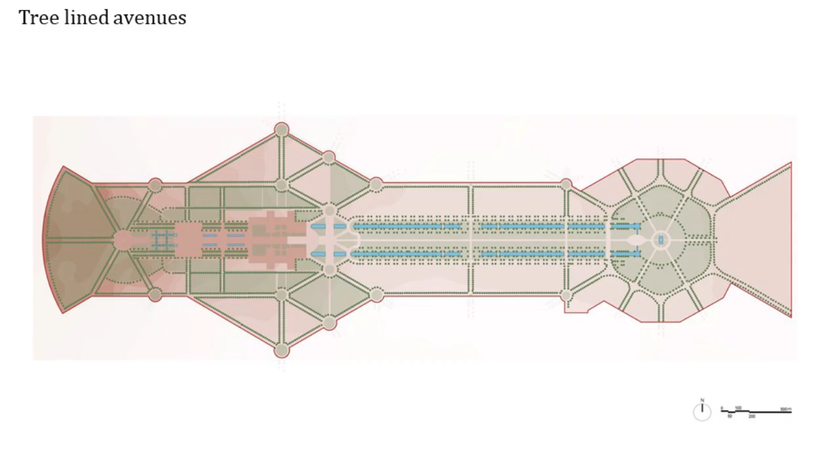So what was the design of the Central Vista about? You had this gently sloping terrain on which a terrace was formed, and a grid of orthogonal radial streets was created. There were formal gardens, a processional route was created, tree-lined avenues were put in - I'm just rushing through what was a very complex process.

Buildings that were imagined - this is from a sketch that Lutyens put together, and this is what actually got built. So here you have a grand boulevard running right through the middle. You have what was Government House, North Block, South Block. You have nodes in between, a gateway here, and this is the focal point - gateway and nodes. That's the essential design of the place.

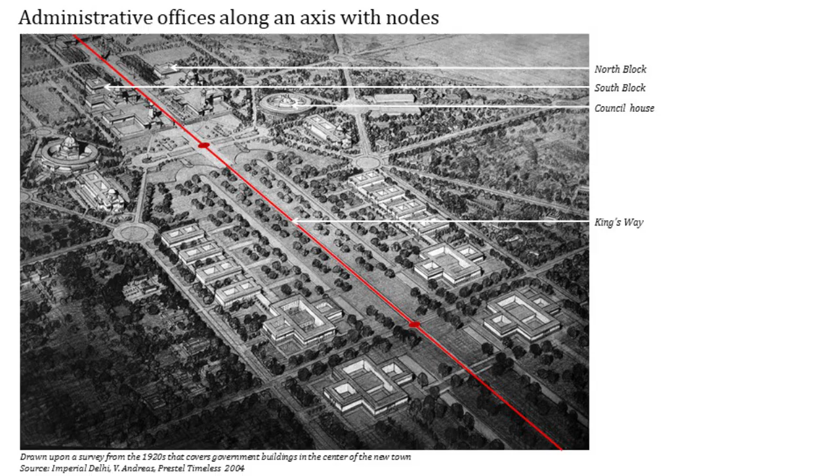So here you have the gateway at one end, India Gate, and this is the sketch that Lutyens drew, with administrative offices on either side. That's the axis that was formed, the nodes as you can see, and that was the focal point, Government House.

And that's an early image of what got built. You had Council House on this side, North Block, South Block, Government House, and this grand axis here in the middle.

We all know that the whole complex was appropriated by the people of India straight away after independence. Government House became Rashtrapati Bhavan. The statue of George V was removed. Council House became our parliament. North and South blocks now had the ministries of the government of India, and we appropriated the whole place wholeheartedly - it became the seat of the government of India.

The post-independence management of Central Vista was unfortunately not very good. Until the 60s, the old vision still prevailed. I must say, here you have images just after independence - you have Rashtrapati Bhavan, and you can already see places like this here on the side and on the flanks. Barracks were built during the Second World War - you can see all these places here and here, lots of barracks built for offices. Makeshift structures were put in place at that time.

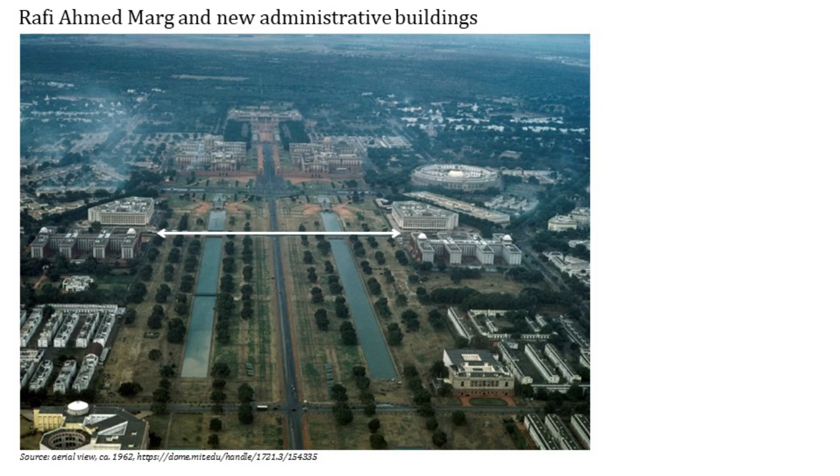Unfortunately, after that, it was all somewhat downhill, because this was the only plan used to administer this entire magnificent space. It became a sort of plotted development. The flanks were plotted out and handed over to different ministries to build their own buildings. You can see all these plots, Nirman Bhavan, Shastri Bhavan, built in the 60s, and then Jawahar and archives, etc.

So this was the vision. This was what was done in the 1930s, and this is what the Vista was. That's what it is today. Let me go back one step here, and another here.

What's it like today? It's a magnificent icon still - seat of India's government, a heritage asset, precious civic space, Delhi's most visited tourist destination. It's truly a magnificent place.

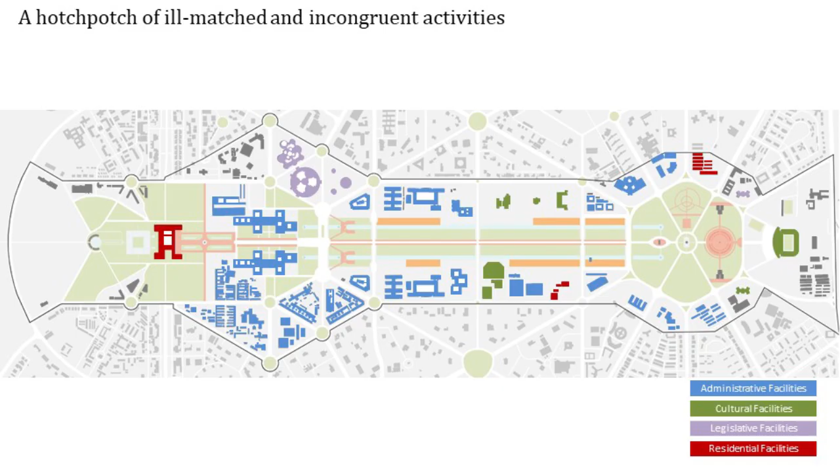But it's a hotchpotch of ill-matched activities, as you can see here - administrative facilities in blue, some cultural facilities, some legislative facilities, some residential facilities. Rashtrapati Bhavan, where the President lives, and some defense quarters here. More importantly, 22 out of the 51 ministries are actually located in this area.

This was meant to be the place where the entire administration is located. The rest of them are located in far-flung places like this.

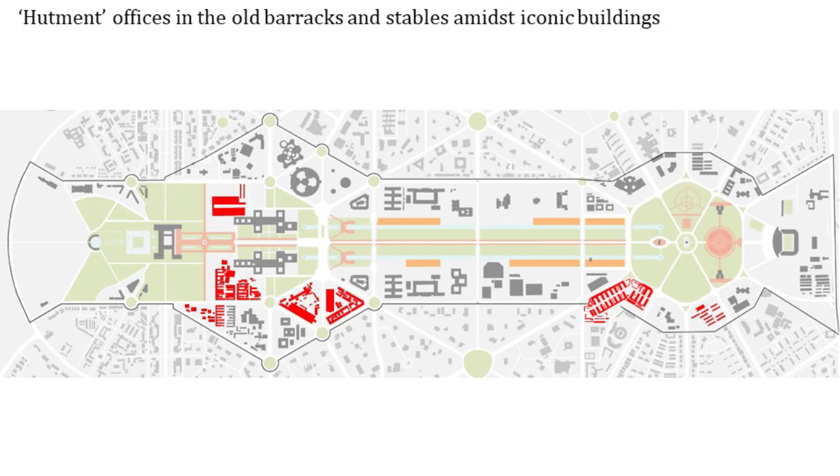Here in these plots you can see - 1, 2, 3, 4, 5, 6 - the old barracks were converted into offices. Some of them were stables and barracks, all converted into offices, and they continued to be used by defense personnel. You have the dental department of the government of the army here, not very important for it to be in this location. So that's what the barracks look like here.

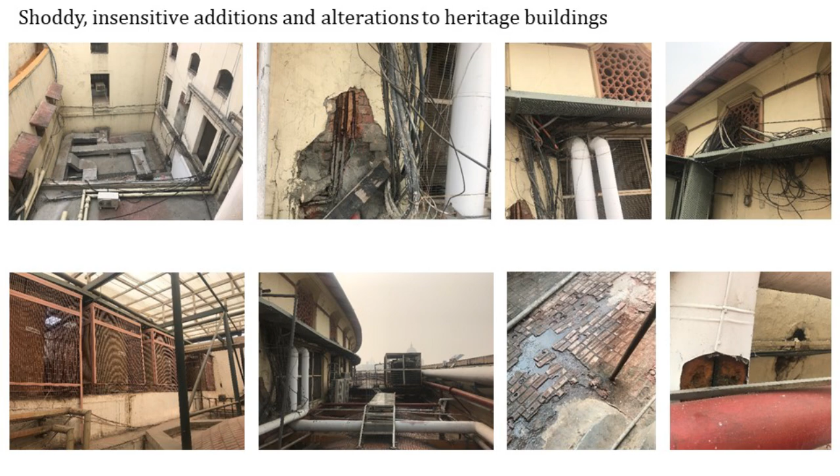The public space, the landscape is quite lackluster and poorly managed - streets, inadequate pavements, really no arrangements for parking for the number of tourists that come here. It has inadequate infrastructure for national events such as the Republic Day Parade, and very few facilities for tourists, though large numbers of people come here.

Over decades, many people and institutions have demanded that the Central Vista should be better administered, better developed, better maintained, and that its heritage should be protected. And so that's what this project is about.

The master plan for this project started with a sketch developed in response to very broad requirements and very minimal information about the site. I believe this is as it should be - start off with a sketch.

What we did was look at all the books that were available. This was already at the competition stage, looking at - fortunately there's lots of good history and documentation of the space here. And thank God for Google, because there's so much information available there. You can build terrain models, etc., from all the information there.

So this is the master plan that was envisioned in October 2019 as a response to the competition. And of course it has been evolving, as you can see here - there are many versions of it over time. That's 4th of November, version 3, 4th of December. As we found more information, more opportunities became clear, challenges became clear, and the master plan kept evolving as we went along.

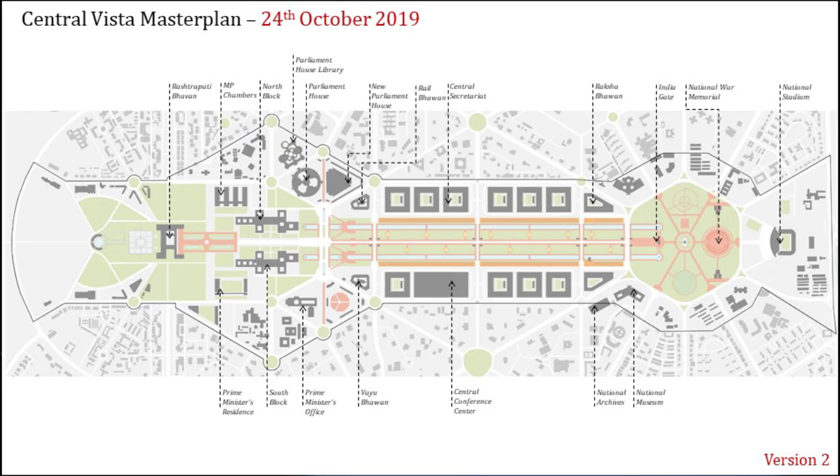So what I'm going to talk about is the 15th of March, 2020. No, that's even further evolution there. Then, of course, it's more fine-tuning after that. I'm going to talk about the master plan that is current.

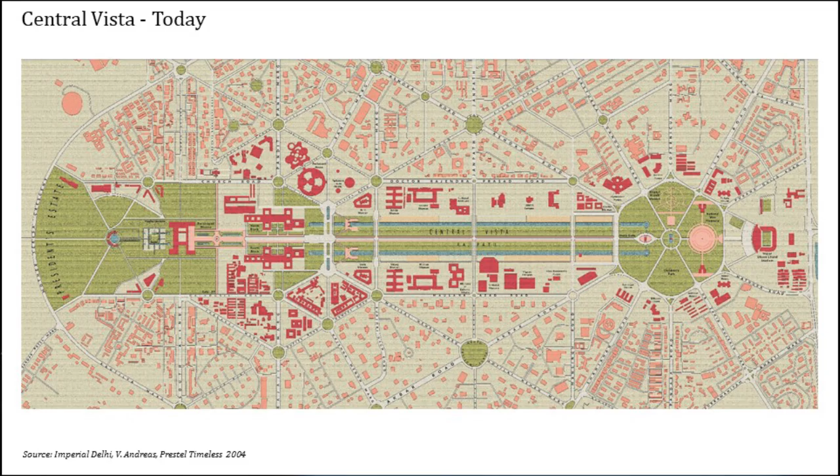So what are the objectives of this project? That's a way of hanging this whole presentation together. First is modernizing and expanding Parliament's facilities.

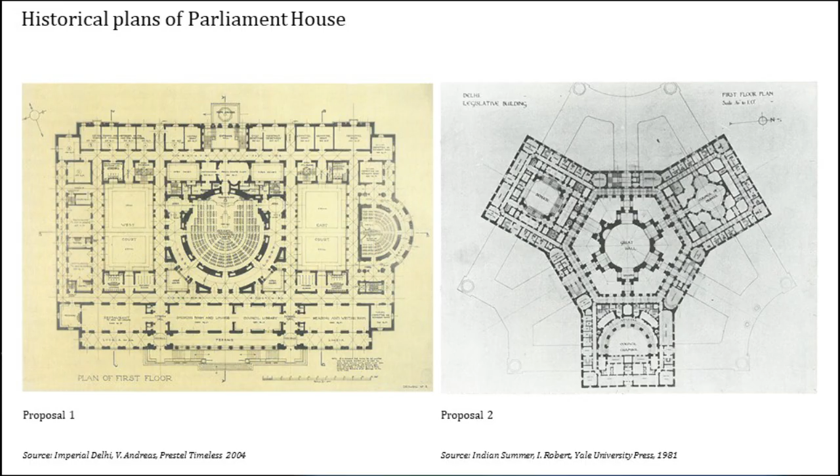So we started off by trying to understand the facilities, and that's the circular building located in this triangular plot on this side. We studied the early drawings. Baker wanted to do a different type of building - you can see a sort of triangular arrangement on the right-hand side. But Lutyens did not allow him to do that, and wanted him to build this circular building. This is what got built.

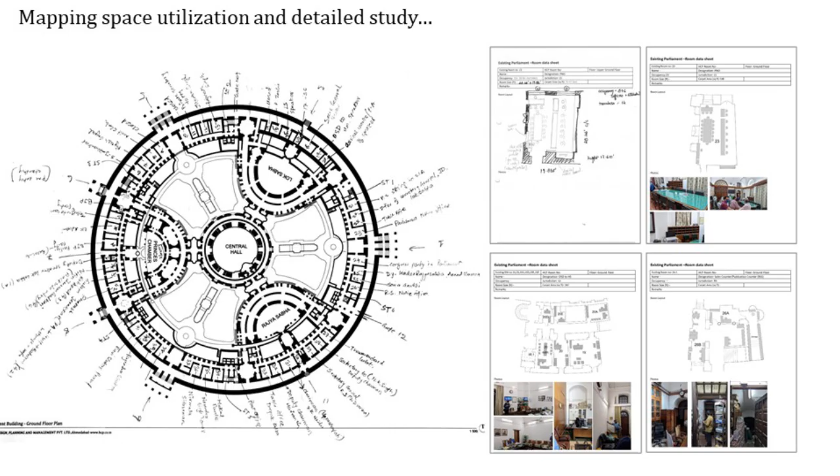Then we mapped all the spaces, as one has to in these sort of buildings with very complex requirements. We studied all the furniture here in considerable detail, and we studied the expansion possibilities.

The offices inside look like this. As you can see here, these are a variety of interiors - you can see a hodgepodge of offices, very crowded.

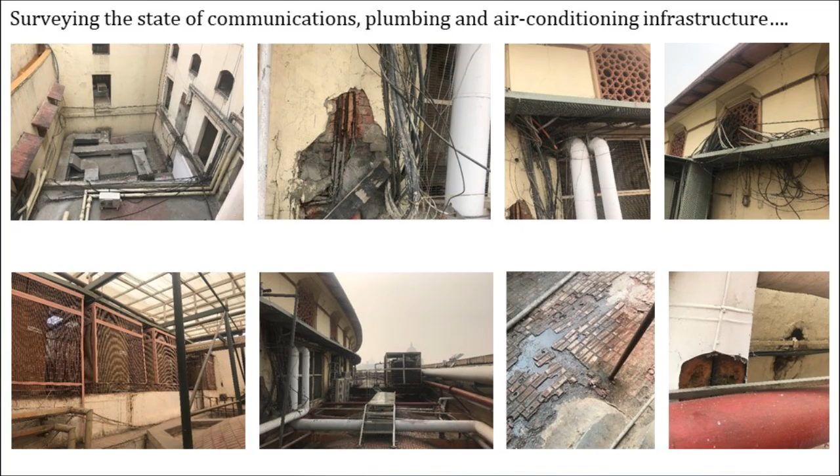And I showed you earlier this picture - that's the state of the building. You can see the infrastructure, the mess of infrastructure - cables going in of this sort, and air conditioning ducts and plumbing ducts, etc. There are foul smells coming, and you don't know where from.

You look at the technology there - it's quite antiquated, it reminds you of those old rail carriages here. The mics can't be shut off, for example, which is why the din in the Lok Sabha can never be controlled. And its seismic safety is also a big concern here.

So we quickly realized that it's a much valued facility, a symbol of India's vibrant democracy. But if we want to modernize it, if we want to expand it, we are going to have to create a new facility, retrofit the old building, and use the two together in conjunction with one another.

So here's the design for the new Parliament building. As you well know by now, it's a triangular building right next to the round building here. We use the plot - earlier this plot used to have parking, barracks for security staff, reception, a hodgepodge of facilities. It was a walled compound. All of this belonged to the Parliament, and we decided to make use of the space that was poorly used.

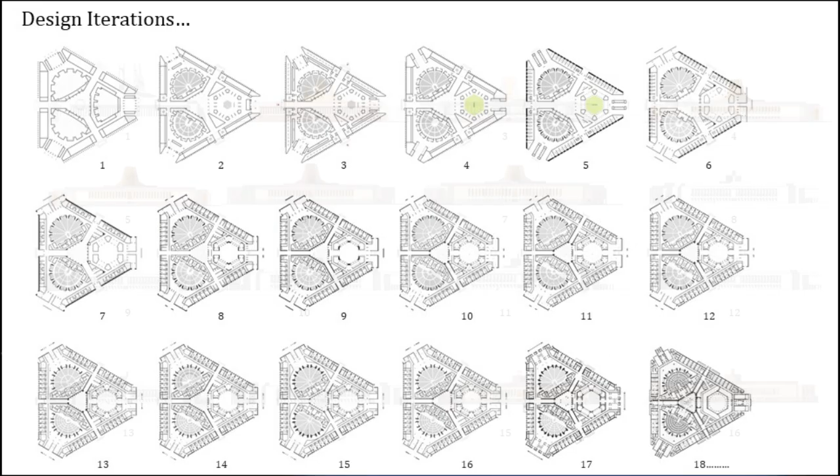The design, of course, has gone through many, many iterations, and this is the last version, also its elevations. Anybody who is a designer knows that you go through many iterations as this design evolves. As you can see here, this image is quite well known - that's the circular building and the triangular building, similar in size and bulk here.

So here you are - you have a round building surrounded by streets on all sides. These are public streets, but these are already private, because on this side there is the library and the Parliament annex. And that's Vijay Chowk here. We are facing north up in that direction.

So the underpinning geometry - it was clear that for a building of this stature, there had to be a strong underpinning geometry. That's what you'll find with most such buildings. And it's a triangular grid, which we slowly came to as this sort of structure.

And that's where the building sits in perfectly on this triangular grid. Just to give you a sense of what is where, the three vertices have the ceremonial entrances on this side. This here is the Lok Sabha chamber, that's the Rajya Sabha. There are three more entrances that lead you in from here, and there's a big central hall.

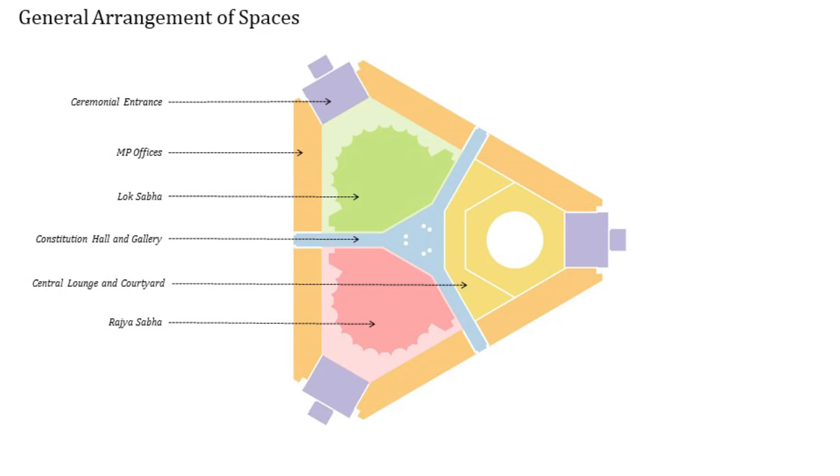Joint sessions used to be held in the central hall in the old building. The central hall also functioned as a sort of lounge with seats in rows, and all the MPs would hang out there. So the central hall in the old Parliament building functioned both as a lounge and as a hall for joint sessions. Now, the joint session will be held in the Lok Sabha because it's large enough for that, and the lounge has been created around this courtyard. So both functions are separated out and work much better now.

So here's a plan, same thing, I'm not going to go over this again. The only thing I forgot to mention is that on the perimeter we have offices - ministers' offices, staff, various administrative offices. These here are offices for the Lok Sabha administration, and these are offices for the Rajya Sabha administration. Let me go to the Lok Sabha here.

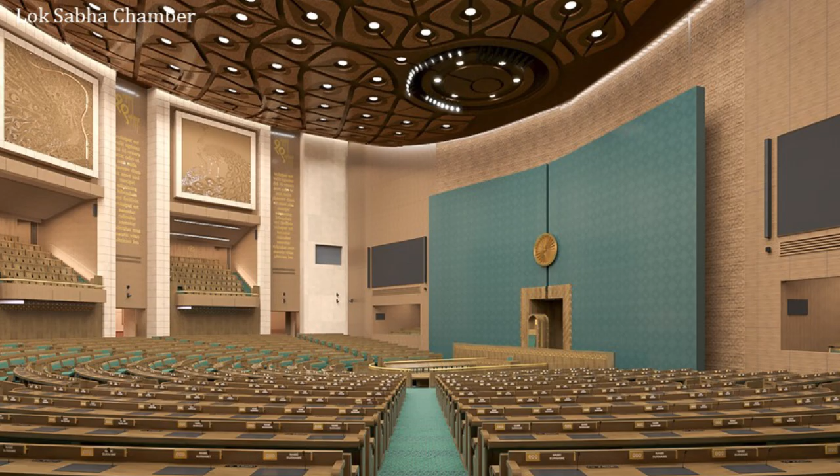These here are committee rooms. Many committee rooms are required, so there are many of these sorts - there are 6 large committee rooms. That's the Constitution Hall in the center. I'll just give you a quick view of that, but we'll come to more of this later on.

Now let me explain some details - I'm not going to explain details about all the projects, but for Parliament I thought I'd spend a little time explaining what it's about, for the Parliament as a whole and the Lok Sabha here. So here you have the comparison of the old Lok Sabha and the new one. What's clear is that the old one is 470 square meters, the new one is 1,300 square meters.

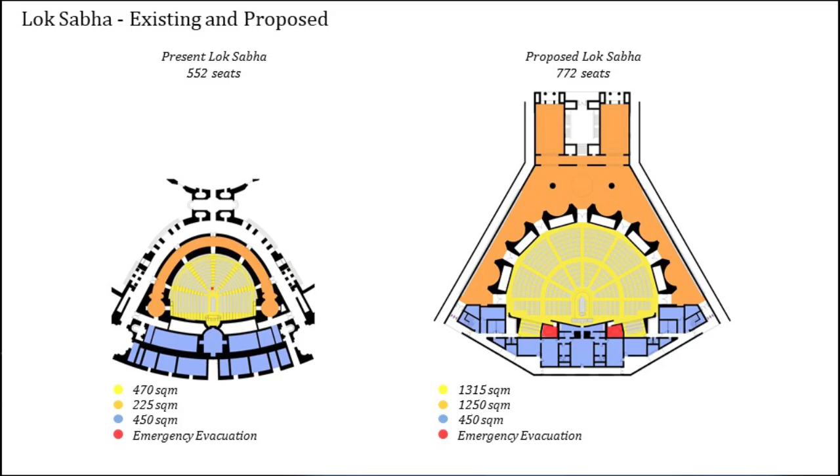This one houses 552 people, this one houses 772 people, and of course it has space enough for the joint session, at which point it holds 1,000 people. The old one has a lobby at the back that gets locked up when Lok Sabha is in session - a tiny lobby - and now we have a nice lounge outside where people can sit. The administrative offices are of similar size but better designed, and there were terrible emergency evacuation facilities before, practically non-existent. So here there are very good emergency evacuation facilities, a big concern after the scare a few years ago.

We decided to keep the horseshoe-shaped seating arrangement that we have - everybody was happy with that and wanted to continue with it, and with the green hall. If you look at the Lok Sabha itself, here you have the chamber, the Lok Sabha Secretariat at the back, and the lounge, all the space all around. That's the ceremonial foyer and entrance - during joint sessions, the president and prime minister come in from here, the procession comes up, and they sit in this area.

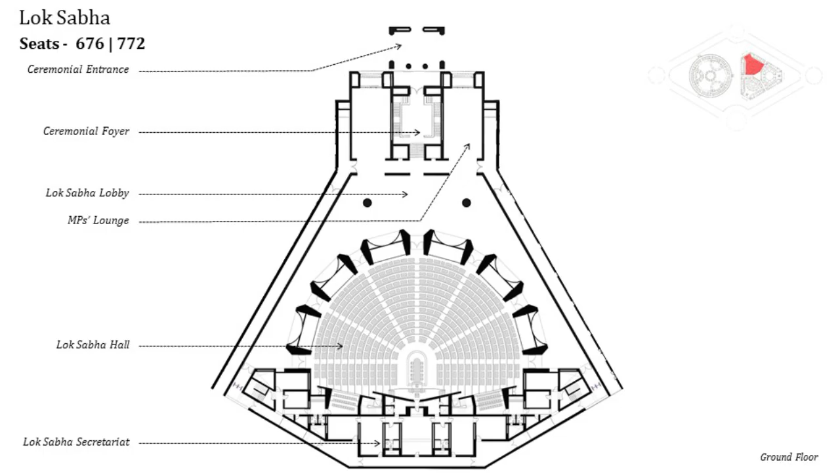So the seating arrangement was completely changed. Here you can see what we have currently is bench-type seating in the Lok Sabha. Bench-type seating means people have to walk in front of you to get to their seat, so the corner seats are prized because you can walk up without disturbing everybody. Now we have changed the arrangement so that people will be able to move from the back and sit down - everybody gets a corner seat.

The seat size is better, it's a little more comfortable. This was pretty tight for a chair that you have to stay in for long periods of time. Nobody, except the first two rows, had desks before. Now everybody will have desks. The movement in front of the seat now means people are going to move from the back of the seat. The technology is digital touch screens for everybody because you need a lot of information there. And the standing space was uncomfortable here; now it's comfortable. So a lot of the arrangement is simply about making the seating work better.

Remember that this was a hall for 150 people. Now it's being used by 550 people. So it was never meant to be this - this was never meant to be a Parliament building. This was meant to be a Council House.

So here it's getting a little bit faded out, but that's the well of the house. You can see here, that's the well of the house. That's where the speaker sits. That's where the prime minister sits. Now the well of the house is a little more spacious, and there are reasons for that.

The well has been lowered a little bit so that people sitting here can still see right across. Here you can see this is a 3D printed model that we made to explain to them how the well is lowered and how papers can be passed to these officers. There's lots of tiny logistics in this - this person has to be able to get up and whisper something to the speaker, etc. So all of those sort of arrangements have been done.

The aesthetic theme inside the Lok Sabha chamber that informs all the fabrics, all the carpets, etc., is based on the idea of the national bird. Let me just explain very quickly - this institution welds India's diversity into a sort of unity of a nation. So we have some symbols of its unity as a nation here, and one of them is the use of the national bird in this place. I'll explain the other symbols later on as we go further.

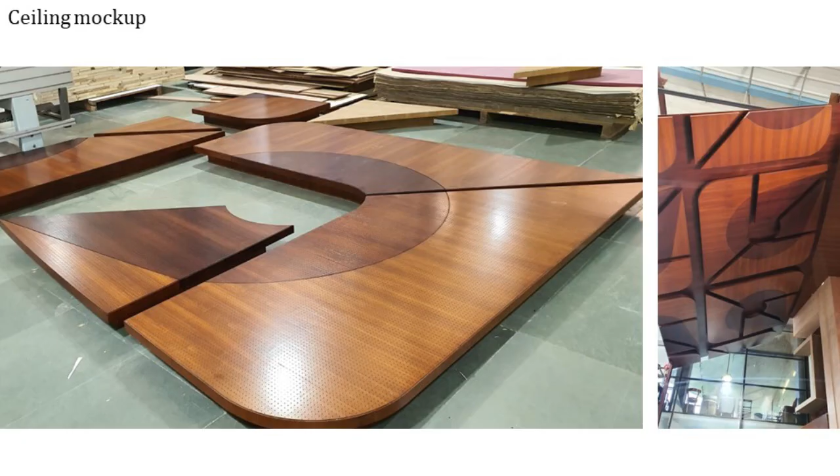Here is the image of it. Let me go into a little more detail. The ceiling is based on the pattern of a peacock's feathers here. That's the ceiling mock-up being prepared in Bombay right now, because it's all going to be made in Bombay and transported to Delhi.

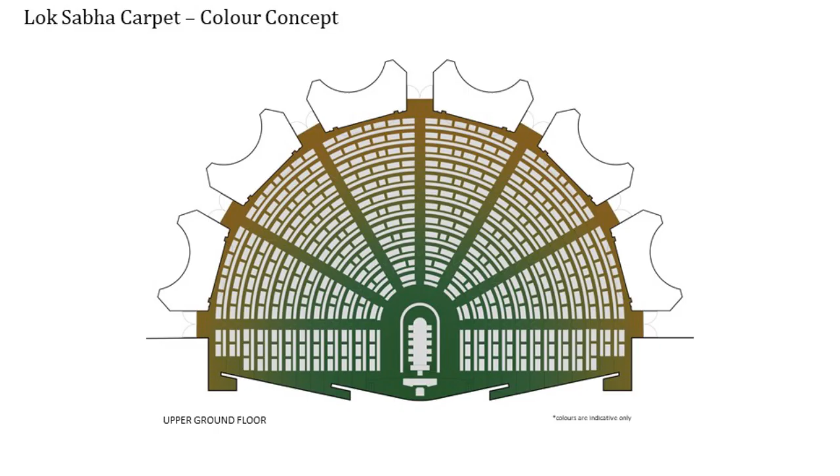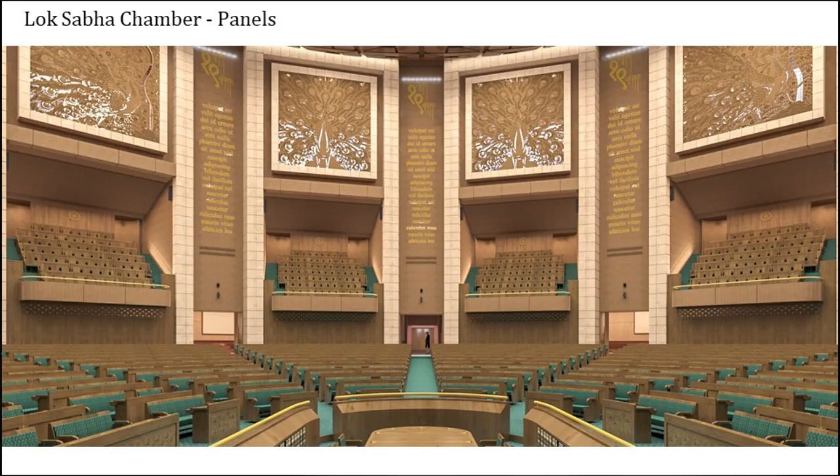Presently the din in the house is terrible because the acoustics are very, very poor there, and that's being designed well. The technology is going to be very sophisticated with the audio-visual system, the digital monitors. So it's being well modernized.

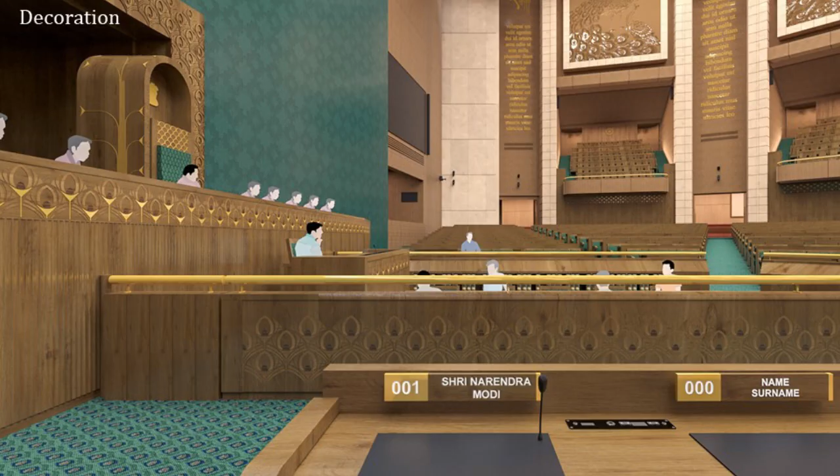These are the decorations on the wooden panels. They're not so strong, actually quite subtle. They're wood on wood, but the colors are getting lost here. Different tables have different sorts of patterns, all derived from the peacock feather. This in the center is so - that was about the Lok Sabha chamber.

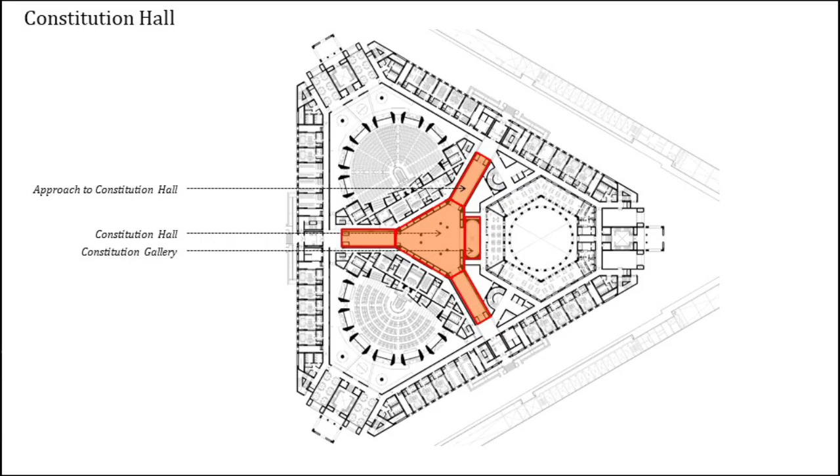Here you have the Constitution Hall in the middle. This is the memorable space that people will remember the Parliament by. There are 3 approaches to it, and in the center is what we are calling the Constitution Hall. You can see it has a height of 21 meters.

Okay, and so that's where the Constitution is. Here we plan that there will be the Tagore poem about his vision for what the nation should be. And that will be there.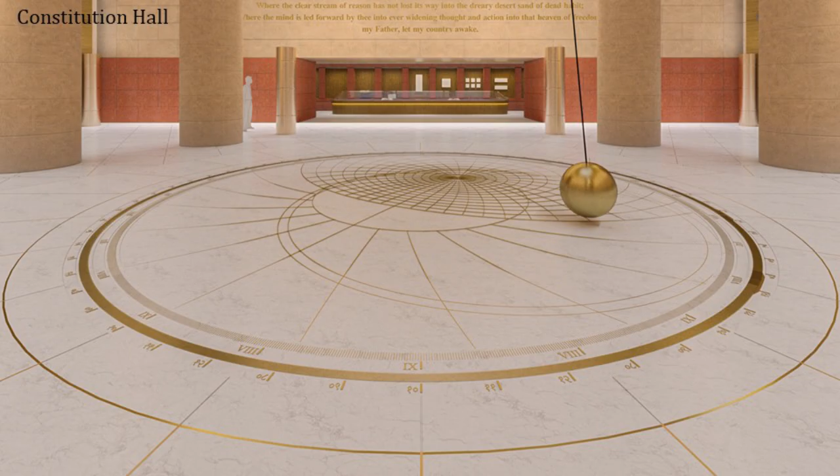Here you have the Foucault's pendulum, and you have the astrolabe that defines Delhi. On the ceiling, you have the star map from 26th of January 1950, when the Constitution came into force.

So this is a sort of a hall - that's where the Constitution will be placed. And here there are artifacts that are from Indian history. So the rule of law in Indian history is signified through the artifacts from various periods.

People are working on these issues right now, and there are a bunch of people fleshing out what this concept can be. These are the ministers' offices.

On the side here, you can see that was the sort of 3D visualization first. That's the furniture for it, lots of detailed furniture. That's the mock-ups being checked out. And here is the actual physical mock-up made in Delhi, because we had to test it and check whether that would be okay. So that's a mock-up for the minister's office.

If you look at the sections and elevations, the main idea I want to talk about here is that the overall height and bulk of the building - you can see the two are similar. So they're going to sit right next to each other, quite comfortably I believe. We wanted the facades, the elevations, to be harmonized with one another.

So the old Parliament building became the starting point, and there were a number of studies of what we would do. Our building is at one level thoroughly modern - it's a concrete structure, frame structure. So how do you make that sort of facade which is matching with this?

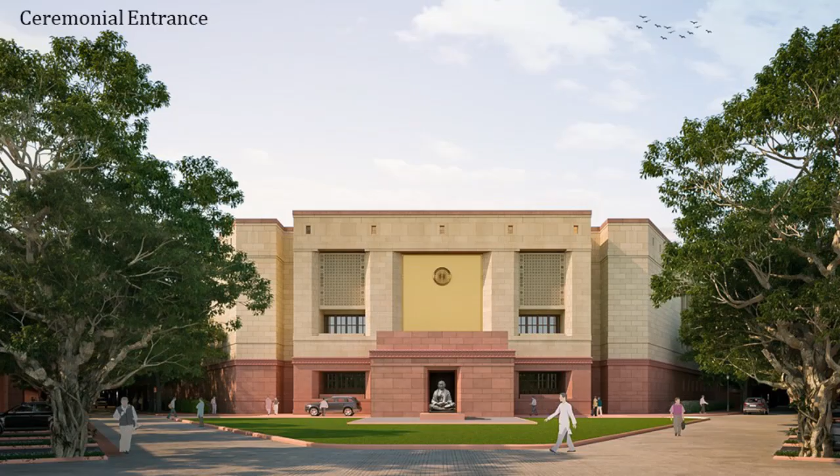And this is what we have come up with finally. As you can see here, that's one end of it. And that's the side entrances, as you can see, coming into this place. And that's the stone pattern here.

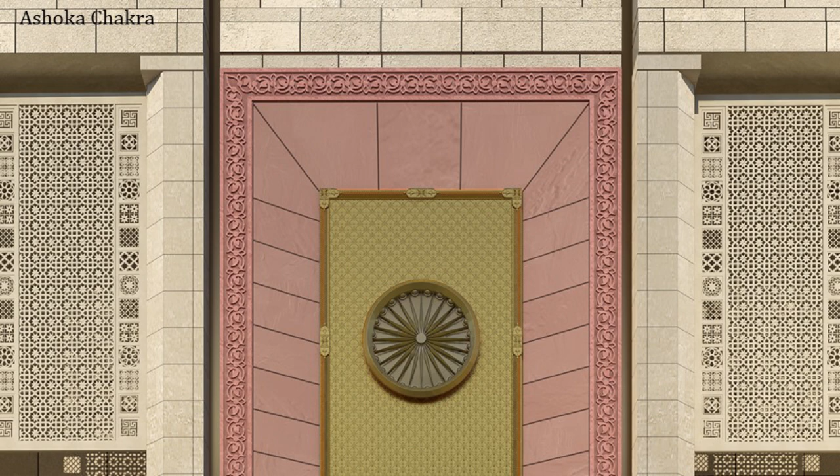And this is the stone mock-ups being tried out for the samples of how the stone will be on the Parliament building. Here we have the Ashoka Chakra on the entrances. You saw the national motto, Satyamev Jayate, there. And that's this - lots of detailing for what the decorations on the side will be like.

That's the brass panel that is there at the back here. That's the jalis on top that will shade the windows at the back, and these are picked up from historical references of this sort, and that's how the jali mock-up is being done right now.

Before I end - the building, of course, has all of these things that we see, but inside it's a lot of infrastructure. That's what all the designers have done. I've shown you, but there's lots of engineering involved in the buildings.

The architects here, of course, know this, but it's a complex building, and a lot of engineers are also trying to get all the engineering right inside here - the air conditioning, HVAC, the security arrangements, a lot of things there.

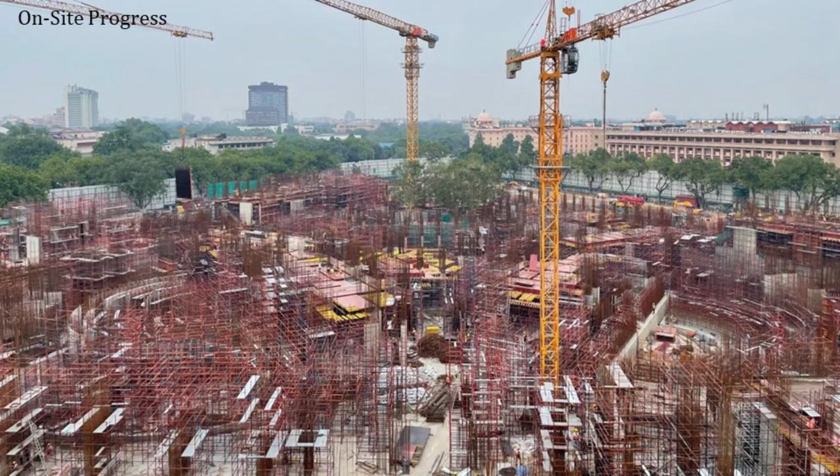Construction is in progress, as you know. This is from a month ago - lots is built. Most of the structure will be ready by January. Okay, and that's one of the chambers coming up. Tata Projects are working on this, as many of you might know.

And today we know that there are 328 days left. We are all racing against the clock. There's a desire to see this finished for the winter session, December '22. So everybody is working towards that.

Now I come to one other aspect of the parliament. On this site, two old ministry buildings are to be replaced by chambers for members of parliament and 1,000 offices, because presently the MPs have no offices. So in Delhi, they operate out of home and various other places, and it's a bit of jugaad for their offices.

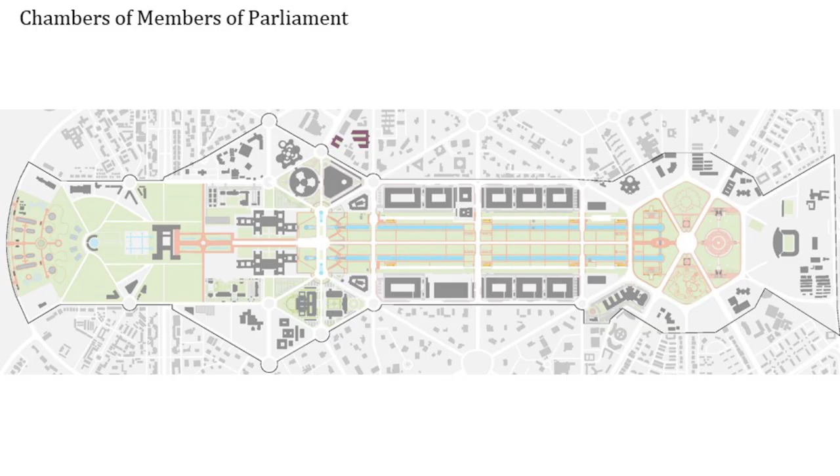Of course, there'll be a tunnel connecting them directly to the parliament building, for security, since the people there need a lot of security. Hopefully, once the tunnels are done, they will be moving below grade, so that people on top, the public, can have easier access to parliament.

Now I need to move fast. That was the parliament building, and I'm not going to spend so much time talking about the details. The next objective, as I said, is improving efficiency and productivity of administration by building a central secretariat.

That central secretariat is these buildings here. You have 9 buildings with courtyards, your conferencing facility, the archives, and 2 buildings here. So there's a total of 11 office buildings, archives, and conferencing center. That's the central secretariat I'm referring to.

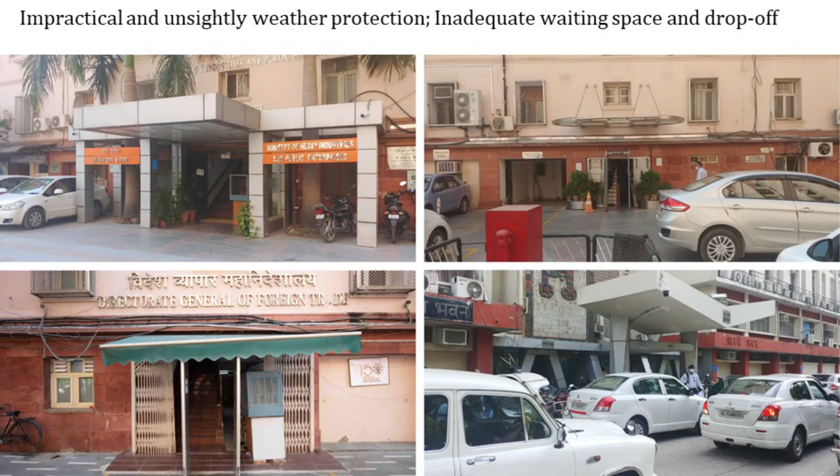The current ministry offices—this is the entrance gates. I don't need to talk about how haphazard the arrangements are right now. You can see these are the entrances to our most important ministries. Foreign trade, for example, goes in through a gate like that.

These are the offices inside. They're cramped, dispiriting places at this point. The furniture—these are not conducive to efficiency and productivity, these office buildings. They have been added to, and were built in the 60s, but are heavily stressed right now.

So all the ministry offices will be consolidated at one place. For those worried about densities, presently there are 41,000 employees working within this blue line here. Now, 9,000 of them are defense personnel who do not need to be here—they are in the barracks I told you about.

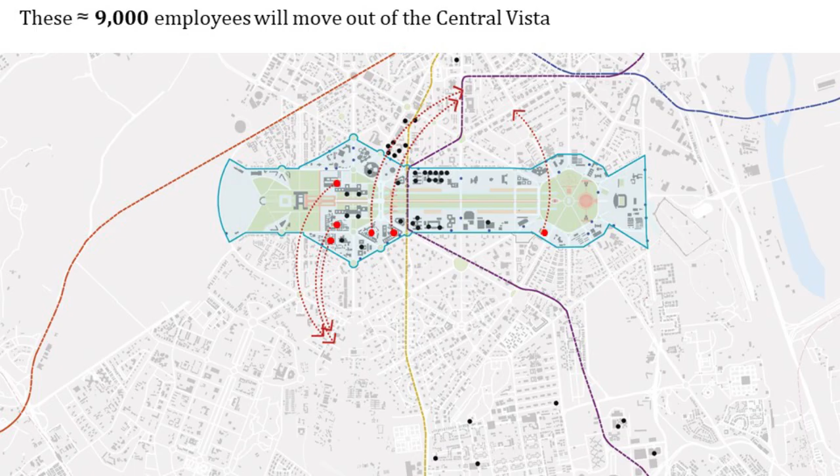And they're being moved out to purpose-built facilities at 2 locations. So 9,000 move out, and about 10,000 are being brought in from these office buildings that are spread out outside. So the overall population will not increase much in this area—the number of jobs in this area is not increasing much.

This is a transit-oriented development. There are 2 metro lines going through here, perpendicularly, and they connect all of Delhi to this one spot. We're putting in a people mover at an underground level so that you can get out of the metro directly—like in airports abroad. You can get out of the metro station underground, get into a people mover of this sort, and get to your office building. So it's a transit-oriented development meant to encourage the use of public transport.

The office buildings themselves—there are 9 of them here. I'm going to talk about these. They're in 4 plots. Mind you, these are presently fenced government properties. They're inside presently existing plots of government.

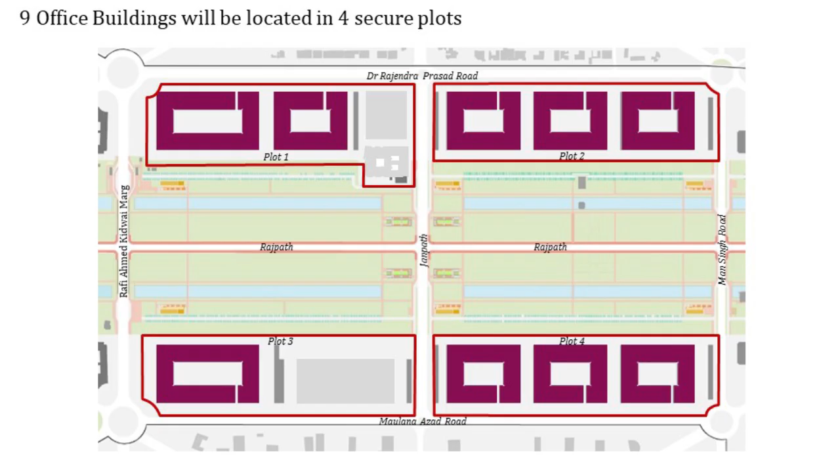Here you have 4 secure plots. I'm going to talk about this one, which is the first one to be built now. You can see there are 3 donut-shaped buildings here. That's the fence—it's about 500 to 600 meters, 161 meters across. This is where the Rajpath is, and the public space for the entry to all of these buildings is going to be from here, here, here, and here.

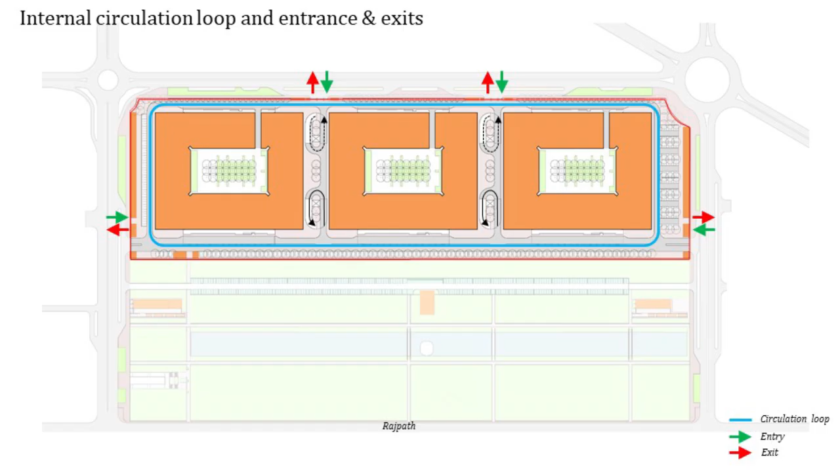So not from the public space side. Even today, it's not from the public space side. And there's a loop road inside. Presently, there are many entries, but they're all going to be reduced to 4 entries here. You can see that's one of the entries from Janpath, for example.

As you go in here, you have parking. You have large canopies—lots of cars can stop together. If you take one building here and zoom in, it's actually a pretty rational, straightforward office building.

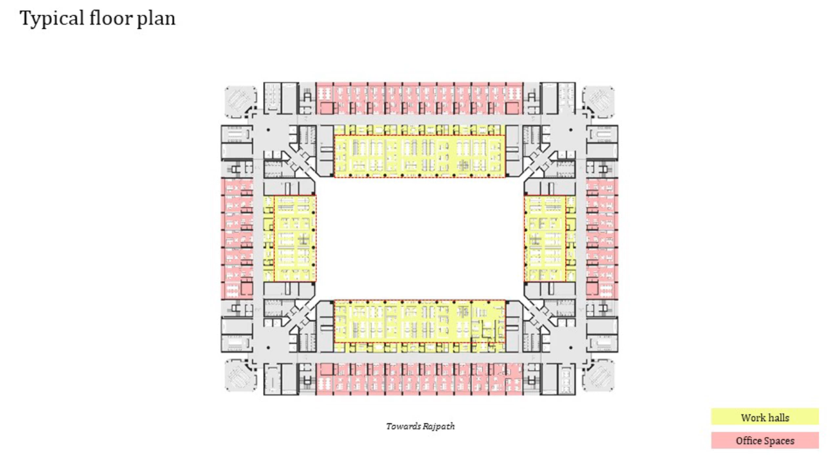The building has an entry from here, and at this end. These are the service cores for the architects—this is easy to understand. These are large work halls that open onto the courtyard on this side. On the perimeter, we have smaller offices, office spaces. That's the entrance porch, like in an airport.

Many cars can stand here because we are consolidating. That's the entrance foyer, reception information. That is the lift lobbies. These are large buildings, so we even need movement for disabled people.

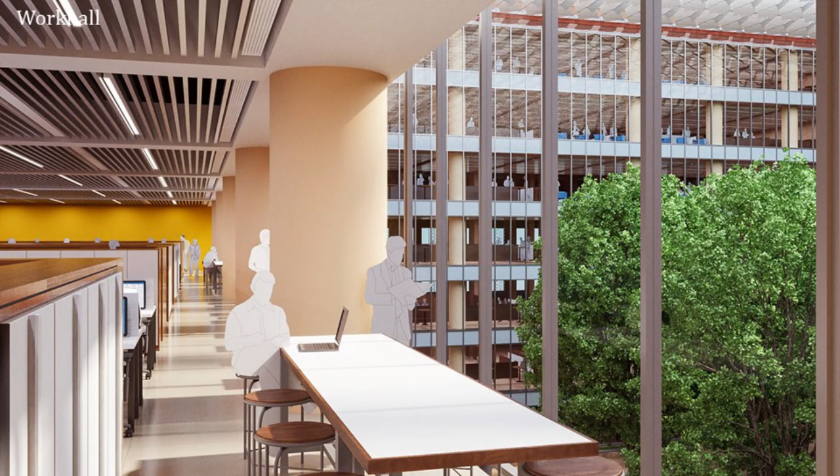These are work halls looking into the central courtyard. You can see here the courtyard doesn't have a basement below, so it can have full-grown trees there, like the Habitat Center. There's lots of hierarchy in work arrangements, seating arrangements. All of that has been taken care of.

That's the standardized offices for ministers, standardized offices for all the different levels of administration. That's an office for, I think, a Minister of State. Many other facilities here—creche, medical facilities—all of these things don't exist at this point, so that's been done. That's the underground people mover, connected to the metro station.

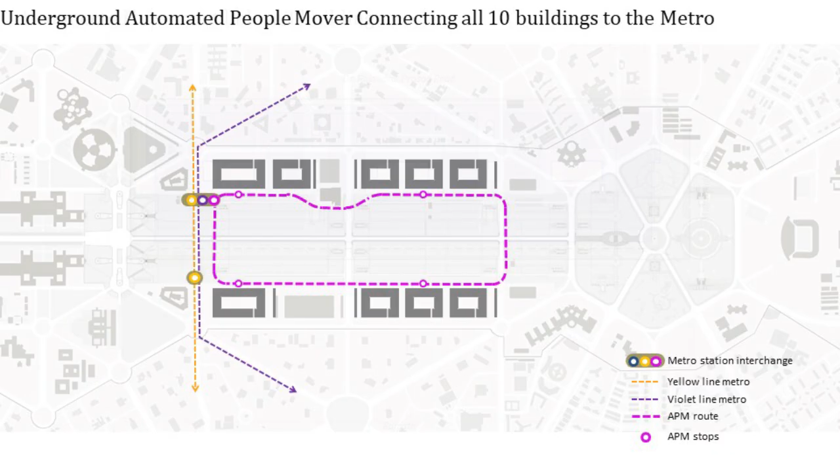You can see here there's a large basement connecting all the buildings together, has lots of parking, but essentially has this people mover that grazes past the buildings, you can see here. And you can see that's the basement level. That's the people mover here.

On this side there's a big service bay. That's the people mover coming in. People go up escalators to their various offices. So it's a rational, efficient office building.

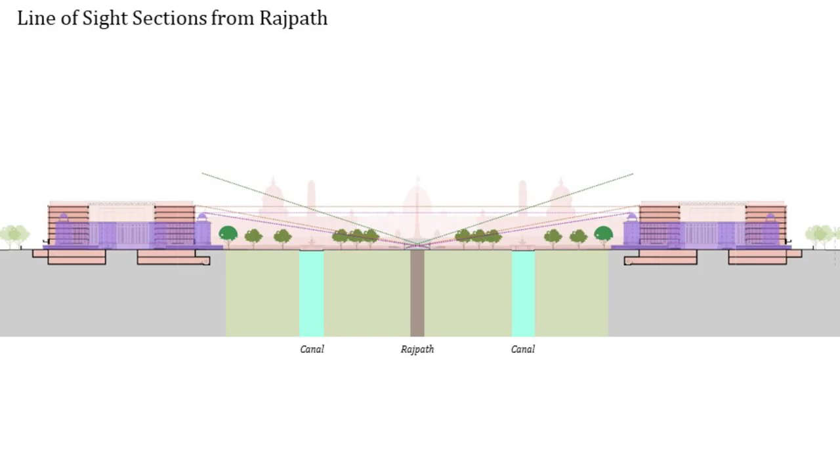When you walk from Rajpath, of course, because of the trees, you don't see the buildings at present. You won't see these new ones either. So they're slightly taller than the present ones, but they will not be that visible. These are not very large buildings—they're like a typical New York skyscraper, but only laid out on the ground.

It's a 1.1 million square feet building, and that's just a comparison—these are large scale. People get worried about the scale, but this is not very large for modern buildings. Even in Delhi, you now have buildings of this size.

The Central Conference Center will be here. Not much has been designed, so I'm not going to talk about that.

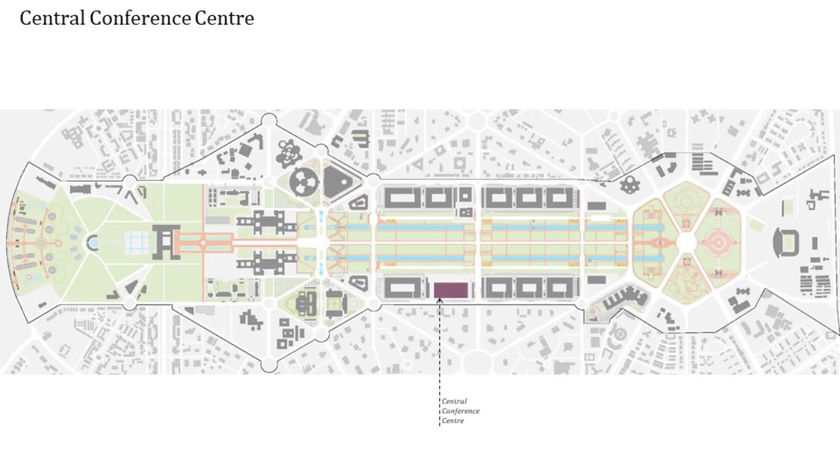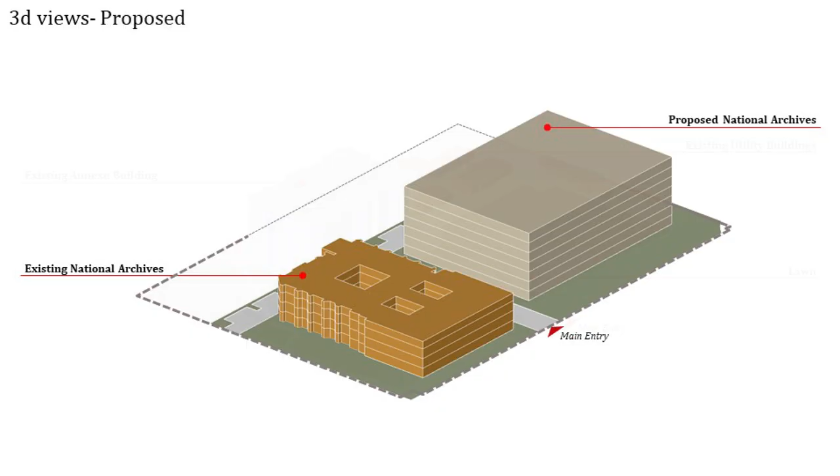So that's the old building, and that's the new one. That's the old building—it has lovely spaces inside, it will continue to remain, but we'll build a new annex building right here. So this will go away, and a new annex building will come up here. It's still being designed, so I'm not going to talk much about that.

Cultural recreation facilities, strengthening them. Okay, Central Vista Avenue—that's the main space here, the main public space here. That's right, this space right in the middle. As you can see, let me talk about that quickly.

That's the avenue space. Here, it's a setting for national events. It's also a precious civic space for Delhi, and it's for Delhi's residents. It's an important place—tourists come here a lot. But it's under much stress. As you can see here, that's the space that is available today.

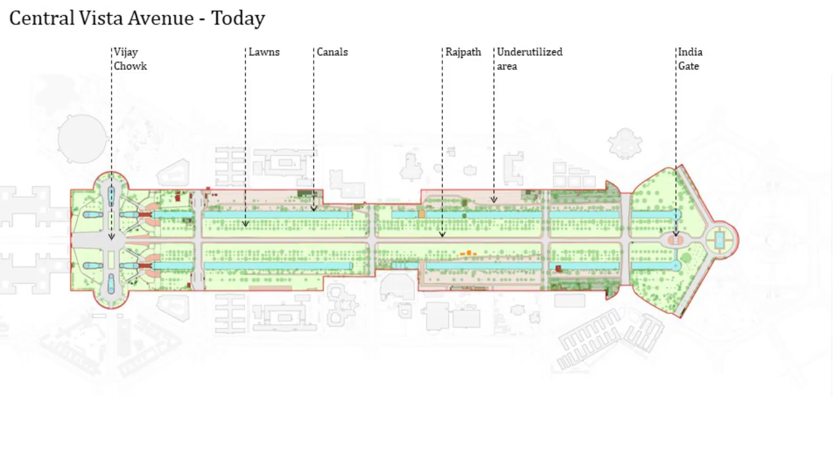And that's what we are going to make. So first of all, this idea that this space is going to be reduced is false. As you can see here, the space is exactly the same—in fact, it's going to increase in size.

Walking along the avenue is not comfortable or safe today, or wasn't. This is what Rajpath was like earlier.

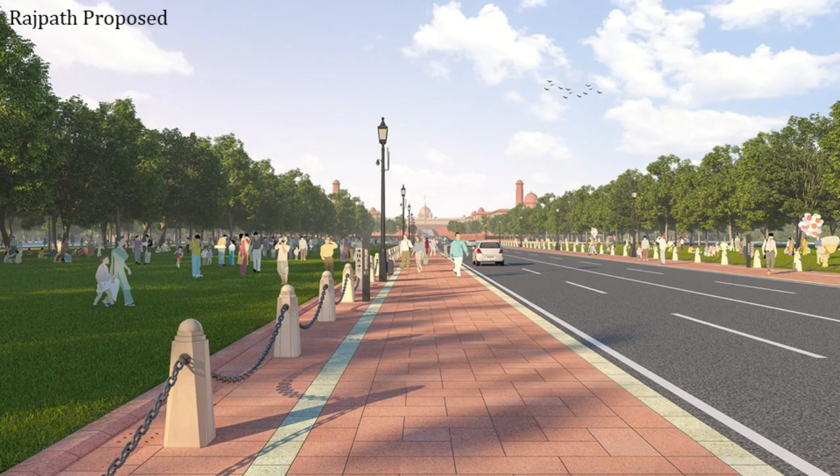That's what is proposed to be done. This is a sample stretch that has been done, and these are pictures from there. It's all being readied as we talk for the Republic Day parade.

There's lots of infrastructure being put in below because the parade needs lots of infrastructure. Presently, they do jugaad of cables going on top.

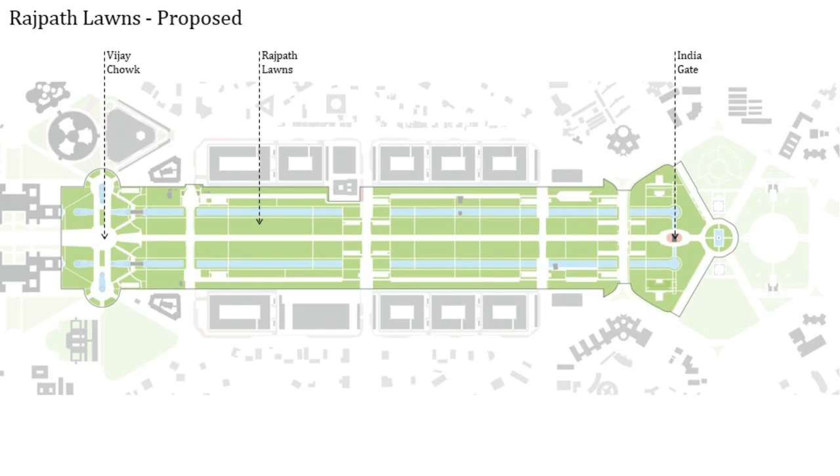The lawns are in very bad shape today. There is going to be a lot more lawns than there are. They're in bad shape like this because they're not level, and there's no watering system. All of that is to be improved. Here is a picture of the lawns as it is coming up.

There's a story about different types of grasses that we have used. I'm not going to get into that.

These were the walking pathways on Rajpath. They're not really pathways, but bald patches in the lawns. Now we're going to have a lot more pathways, so this place is more accessible.

So these are the canals. Earlier, the problem was that on account of these canals here, all the place at the back was not used much at all. It was inaccessible. Now what we have done is build bridges across this so that the parking can be at the back, and you can walk to the central space over the bridges and come. And then there are pathways here.

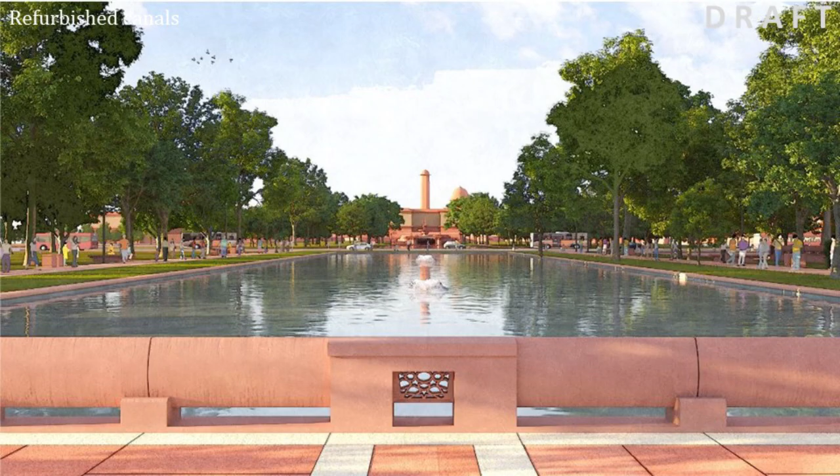Here is the canal as it used to be, painted blue, and this is what is imagined in its place. This is being built. The entire canal has been rebuilt because it was leaking out here.

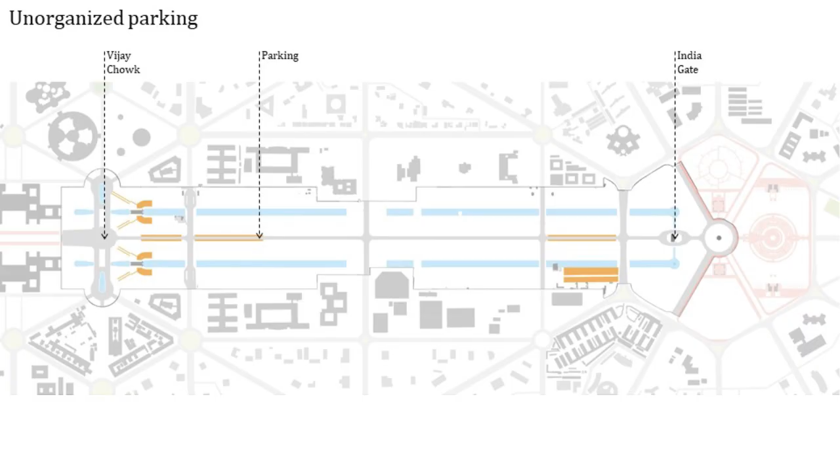The parking is all now, instead of being on the streets here, going to go at the back, and people will walk to the front from here. So that's what it used to be, and in its place now we'll get parking of this sort at the back. That's being built as we talk.

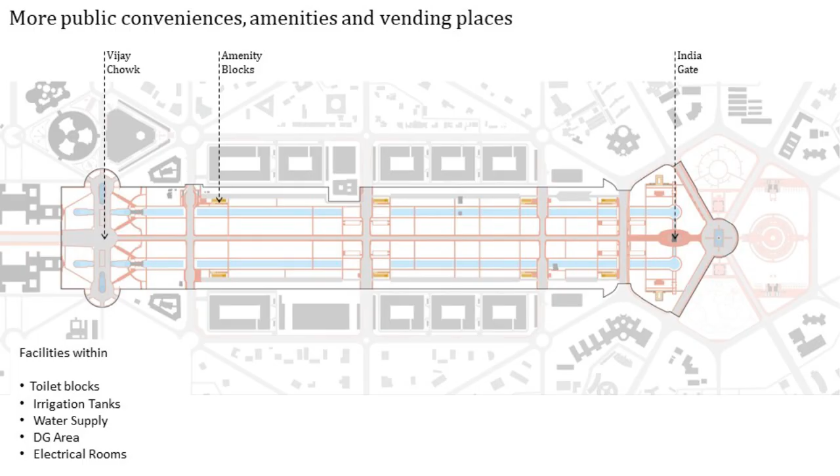The vendors all congregate near the busy junctions, so they will all be at these places. More public conveniences, toilets—the vendors are going to be here, and toilets of this sort are going to be built. These are all lower level, so you see nothing above 5 feet in that public space.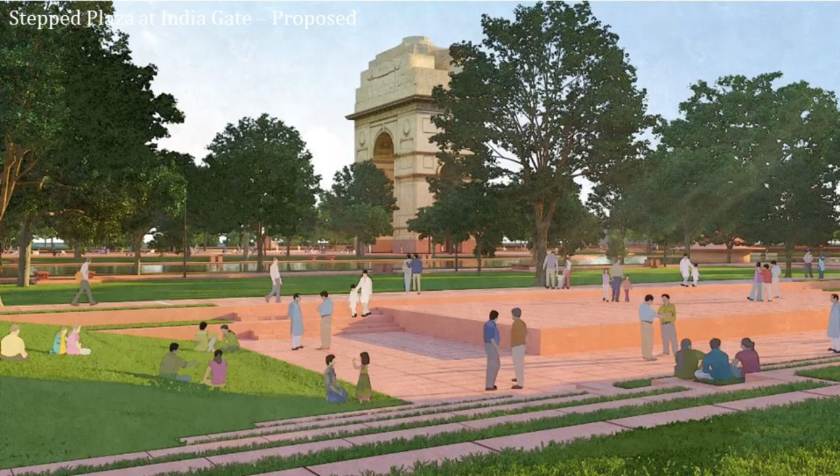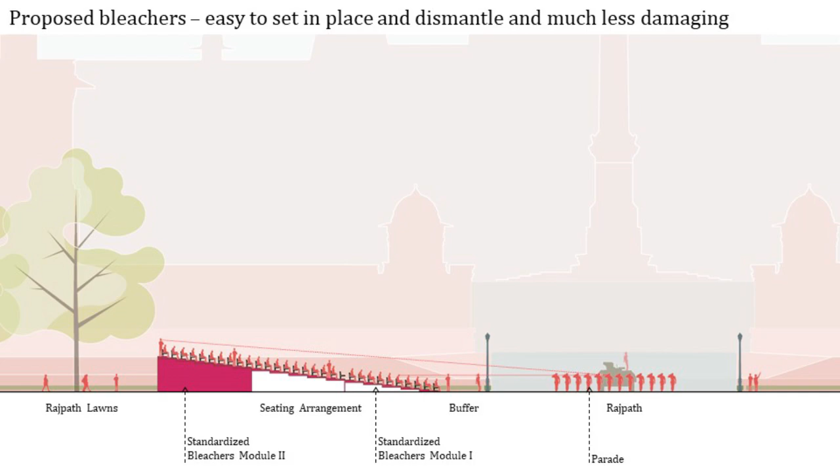We proposed that instead of doing this sort of stands and seating, we must have bleachers that can be put here and taken away once the parade is done with. That's the kind of bleachers we proposed, so that everybody gets a good view. And so that's what's happening.

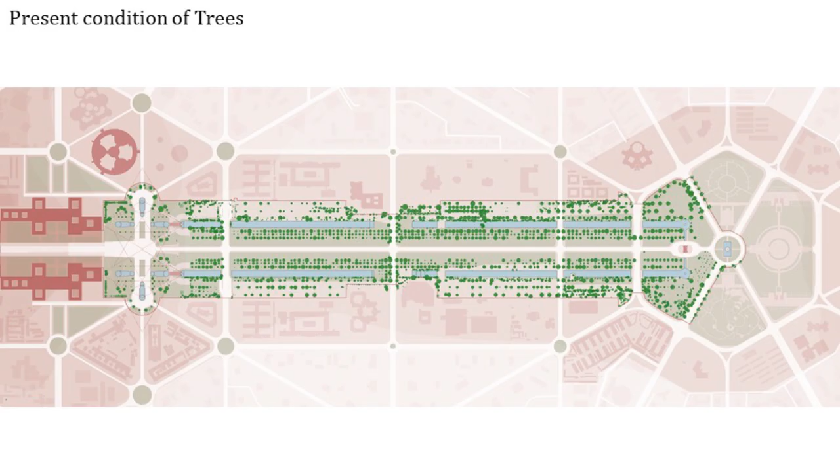The trees on Central Vista Avenue have created a lot of controversy for no real reason. That's the present set of trees you can see here. This is the proposed new master plan, but this master plan for trees will be realized over decades as the old trees die.

These are the magnificent jamuns there. There are 1,200 jamuns. During Lutyens' time, there were 450—this is a Lutyens jamun. These jamuns were planted later on. So from 450, we went up to 1200.

Around 23 trees have been transplanted to create toilets and underpasses. Otherwise, all the trees are there. There was a lot of talk about that, so I just wanted to mention it here. The trees are all there, and we have lovely lawns below. We'll talk more about this if the issue comes up.

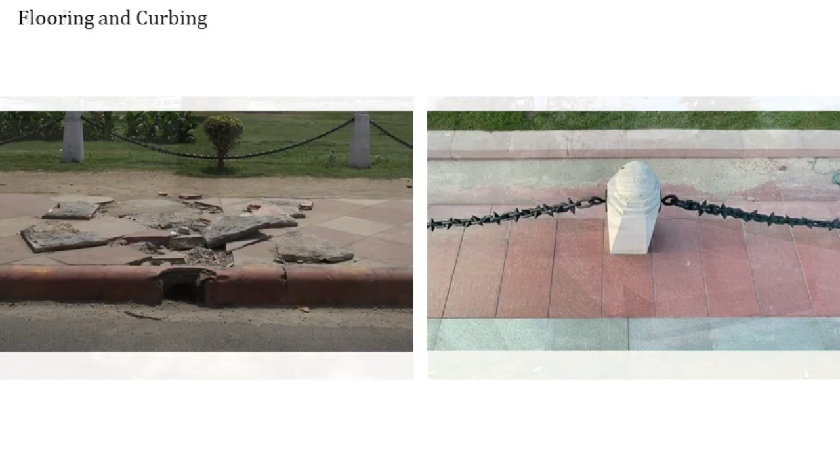Instead of flooring of this sort, we have really good quality flooring there. Instead of bollards and chains put in this manner, we have properly done bollards and chains. Light poles now have all LED lighting, and the signage system is also fairly advanced, good quality signage. That's the designer from Delhi who is working, Lopez.

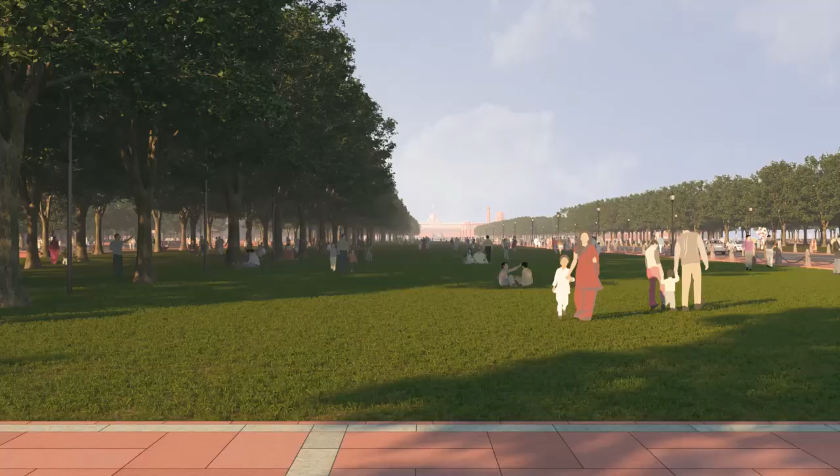Here, just a quick look, that's the section of what is proposed. Most of it is in place for the parade; some elements are left. So essentially the same space, but refurbished and upgraded and provided with more amenities, more facilities, more lighting. The space itself is a little larger, and with the canal, it's a magnificent space. Not much had to be done, it just had to be polished up, spruced up, and modernized in many ways.

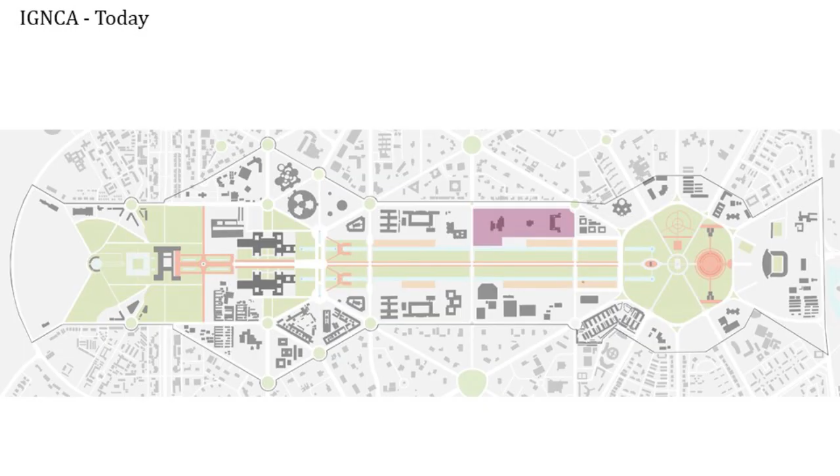So that's the parking at one end, the buildings here. IGNCA used to be in a building with 500 people working in a 25-acre plot. That was the old building of IGNCA. The facilities inside were not something to talk about. That's the kind of arrangement inside IGNCA when you go look at it. The new building is going to be here.

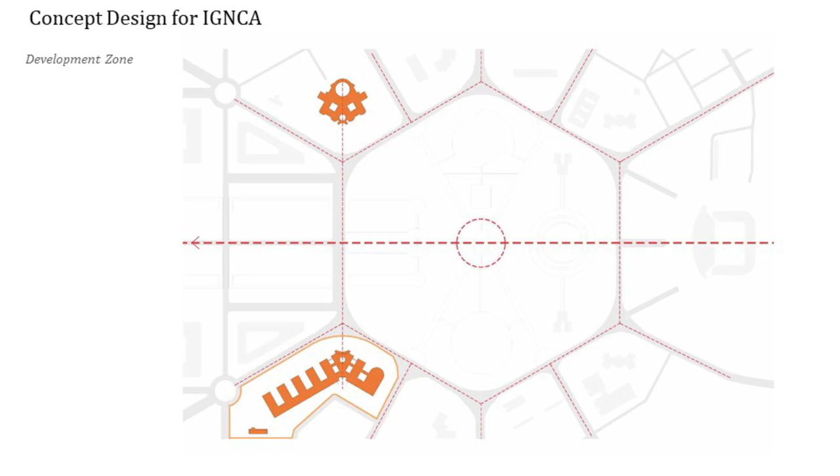It's right across from Hyderabad House, so the design builds on the Hyderabad House design. It uses the symmetry here and adds new blocks. I'm not going to talk much more about this, just leave you with a few images of how this is being designed. That's the new IGNCA coming up in this 12-acre plot. The original plot was 25 acres, this is 12 acres. That's the new IGNCA with its labs and various facilities they need, and a cafe on top.

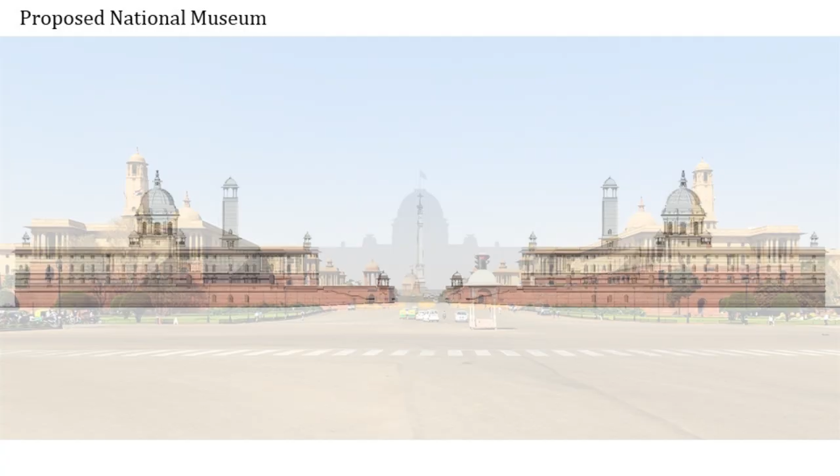The National Museum, an important part of the story, is presently here. It's 25,000 square meters, and the north and south blocks are going to become the National Museum. These are the north and south block administrative offices. At some point this entire axis becomes public, and you're able to walk up the hill. What are the buildings like? Someday we'll have museums and exhibitions in these halls.

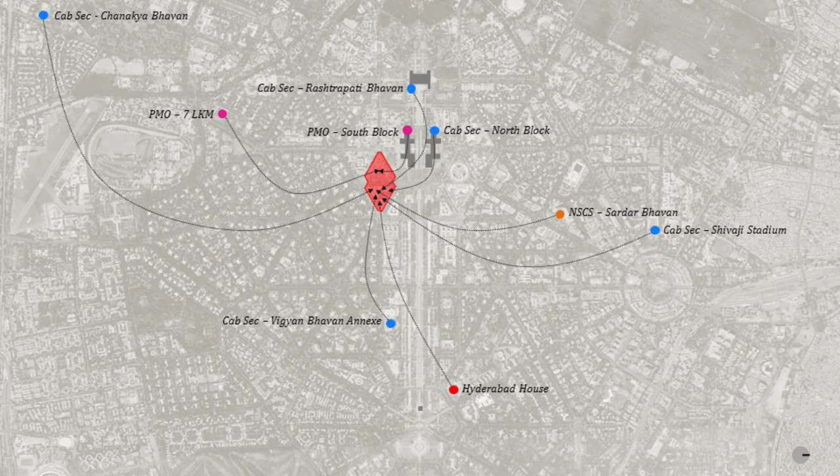So what is presently government buildings will become public facilities of this sort, modern, secure infrastructure for executive offices. This plot had barracks. Here, the PMO, the Cabinet Secretariat, the National Security Council Secretariat, and the Hyderabad House state functions are all going to happen. All of these are connected by underground tunnels, so that the Prime Minister's movement is minimally disruptive. Once that goes below ground in a golf cart or something, everything else becomes a little easier. All these offices in different places are being consolidated in one place. You can imagine the dysfunctionality of these things being spread out over Delhi; they're all coming together now.

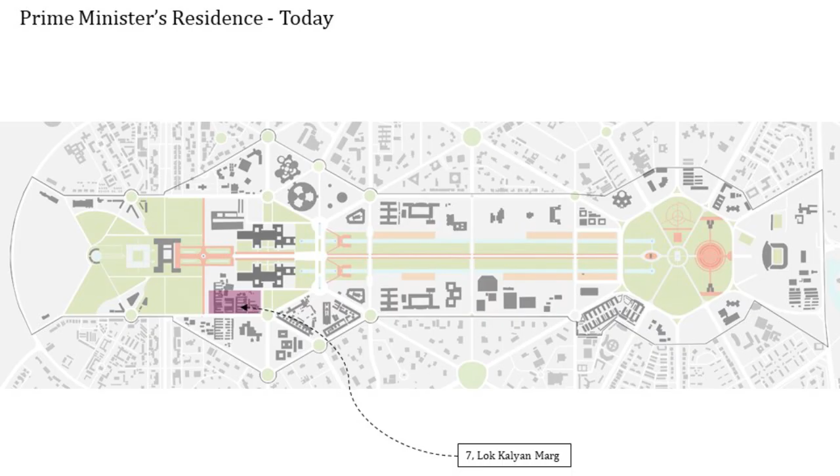Vice President and Prime Minister, the Vice President moves from here, and this plot, which had barracks, is going to be converted into a facility for the Vice President. That's the house for the Vice President, that's the house for the Prime Minister, moving from 7 Lok Kalyan Marg to this place. In fact, that and that, Vice President and Prime Minister, these are the houses that are coming up there.

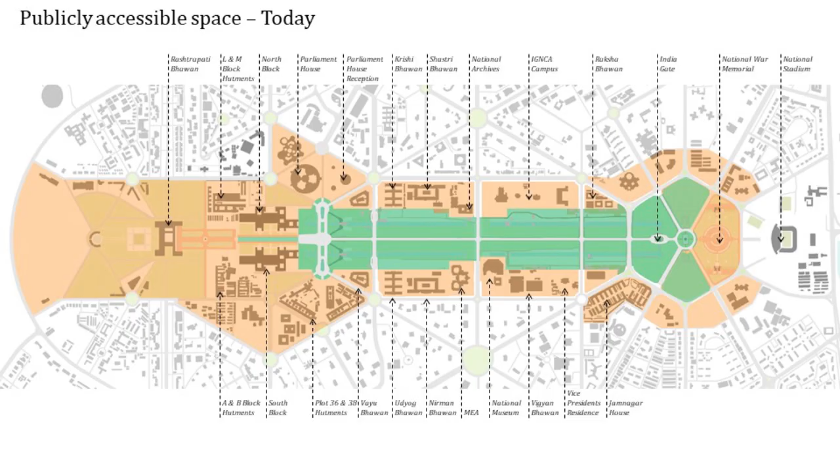So finally, protecting heritage, expanding public space. All these buildings are being restored and brought back to their old glory, in a sense the National Archives, the Parliament, and the North and South blocks. Public space used to be this much here; in fact it is expanding because the plots are being pulled back, and expanding up the hill. And these buildings are also becoming public facilities.